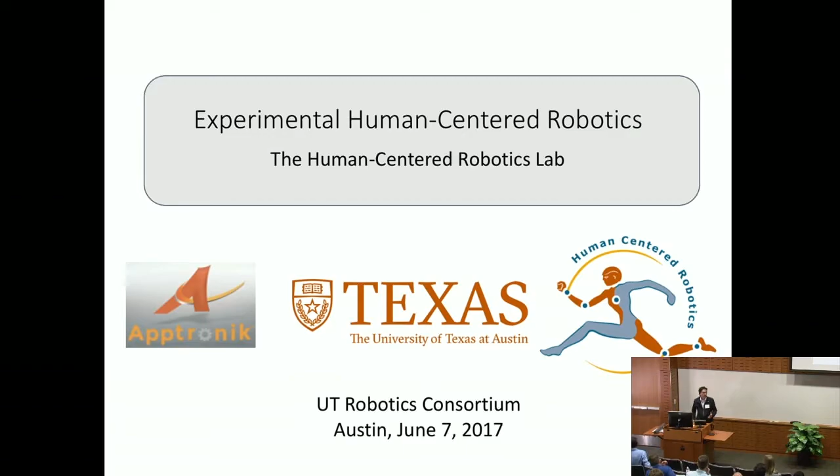I'm going to be much more concrete, talking a little bit and introducing the scientific aspect of what we do, and also the kind of spin-offs that come from Texas. I started myself as faculty here in aerospace about 7 years ago.

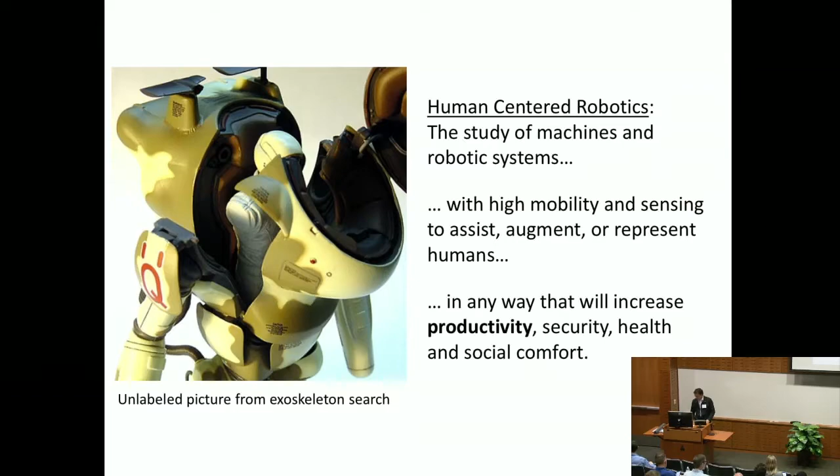What I call the field of human-centered robotics, these are systems that are mechatronically fairly complex, but at the end of the day, the equation we're trying to solve is productivity. Whatever that complex form takes, mobility, manipulation, and autonomy ultimately has to be productive, or has to allow us to be secure, healthy, and have social comfort.

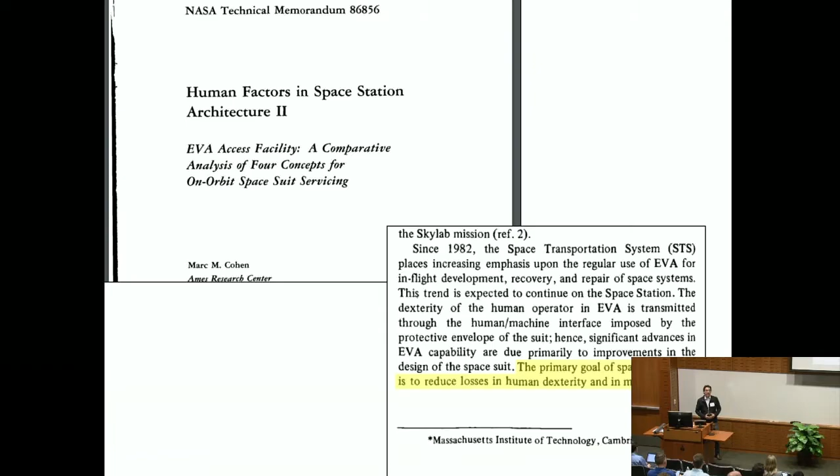Productivity is a big term for me, depending on the industry. For Disney, productivity in the world of robotics means entertaining. Industrial productivity means perhaps number of parts per hour, per investment, and so on. But for NASA, where I work a lot, productivity in an EVA exploration might mean the dexterity of wearing a suit. Robotics, exoskeletons, and so on have to fulfill these measures.

For that, I get inspiration from behavioral sciences, in efforts that those people are making into modeling cognitive behavior, doing inference over cognitive states like confidence and motivation, and in which ways we can use robotics and control theory to intervene in the way people end up doing things more effectively, more productively.

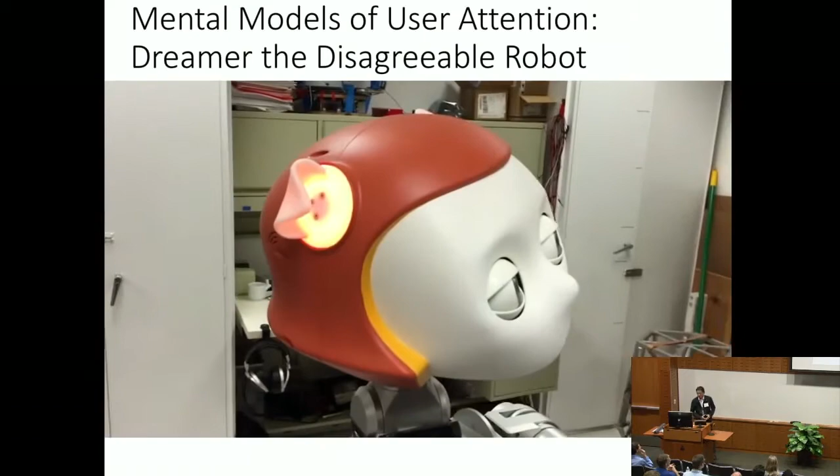These are some of my students playing with productivity models as dynamical systems influenced by a workload on a human, and by the own state of the system. We use this ultimately, as a proof of concept, to see how we can do this inference.

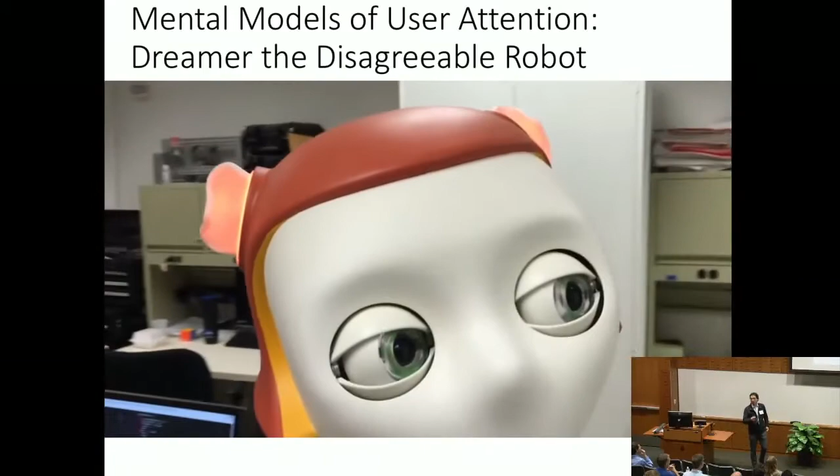In this case of being unproductive, the robot actually is looking away. When you look at the robot, we have a model of how upset the human is. It was not my choice, it was my student's choice—part of what the students do is play around. The robot turns its head based on these kinds of ideas.

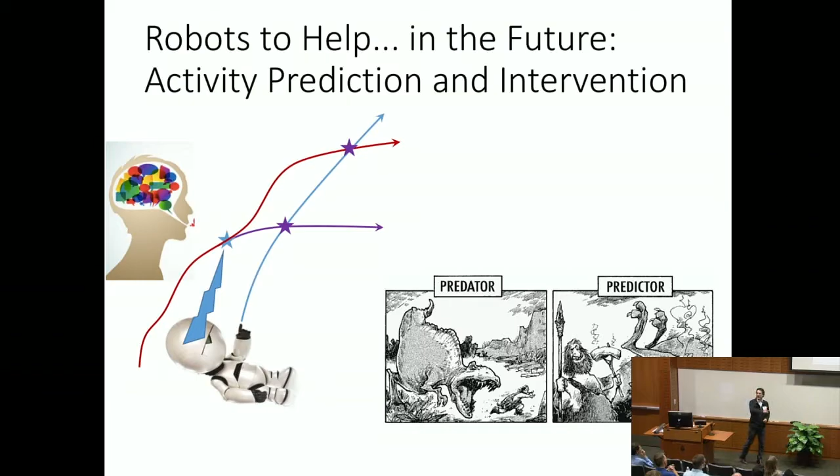Ultimately in robotics—and I come from Silicon Valley industry—productivity in the future might mean the robots have to predict more of what's going to happen in the future. They have to anticipate and then fulfill a task, a demand in the near future, as well as instantaneously.

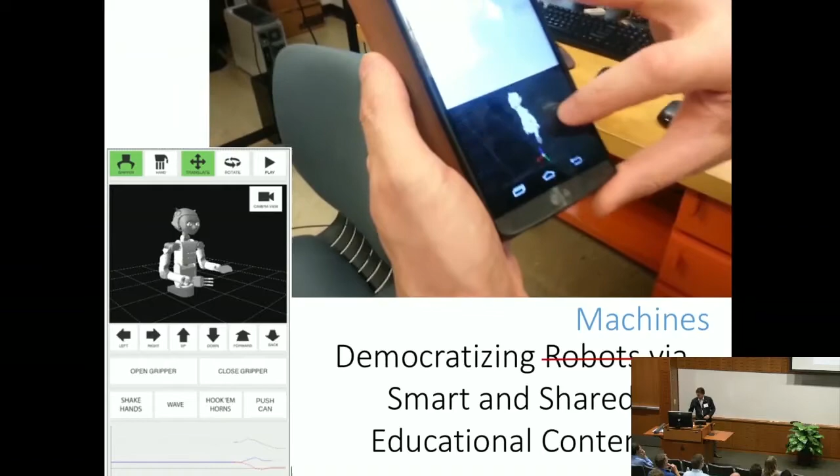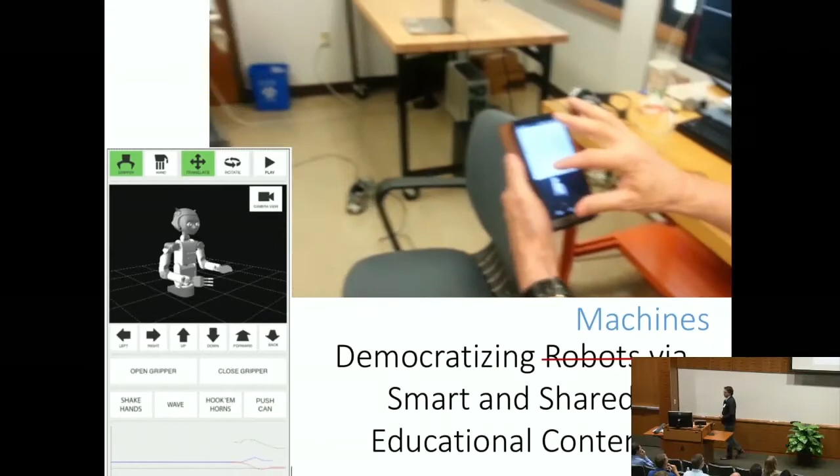So now Luis is going to go ahead and control the robot, Dreamer, for instance. First, let's go ahead and make it go into the ready position.

Okay, so he clicked a button on the screen.

From an academic standpoint, why would people connect to a robot? Well, content is very important—in this case, educational content, but also training content for companies. They want their people, technicians and engineers, more involved. So we focus on browser-based content for studying dynamical systems, control processes, vibration theory, and so forth.

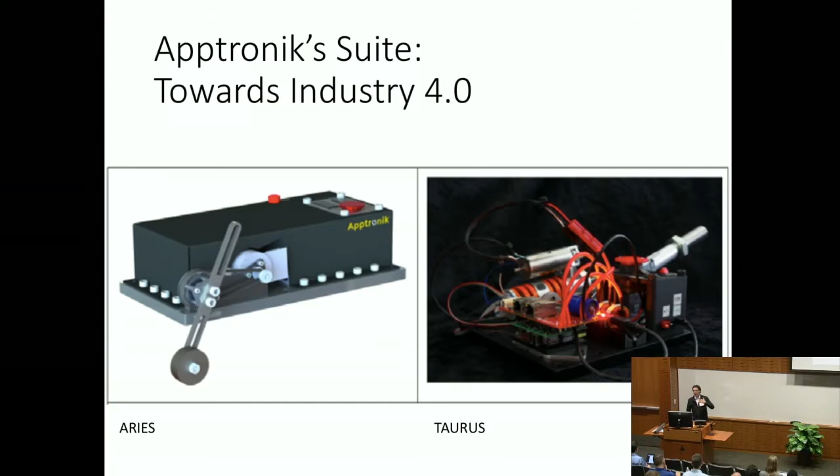One of the pushes we've had at UT is to create companies. In part, answering the question about devices, it's to some extent hard for us to maintain very complex devices, but we ambition to create them. One of the things a lot of the faculty here do is create companies. I am co-founder of a company called Apptronik. We develop these devices, and they are industrial grade—they can function for a long period of time and can be maintained.

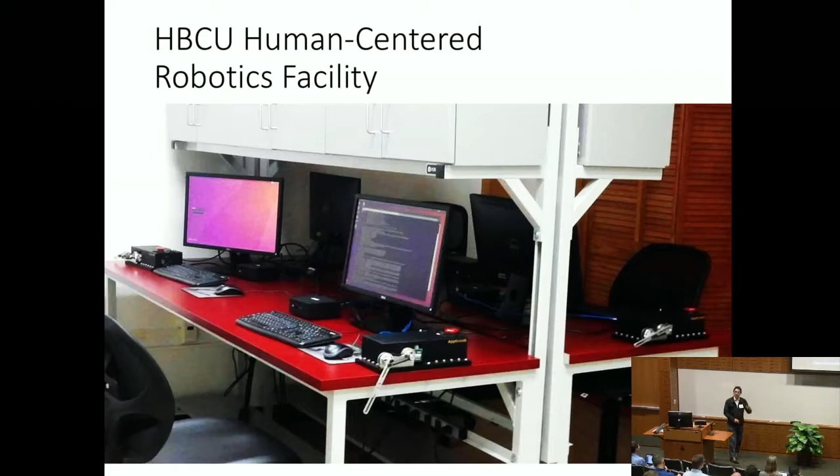These are devices we first developed for NASA. They are deployed. We build robotics facilities as a company and as a university. Huston-Tillotson, a historically black college, is part of this effort.

Another thing we do is create courses based on what we believe future industrial needs will be—in this case, prediction of some states of the human, and control processes for how robotics and human interaction can blend together. A lot of the focus in my lab, and I think I speak for many faculty here, is on collaboration with industry and with great laboratories like NASA.

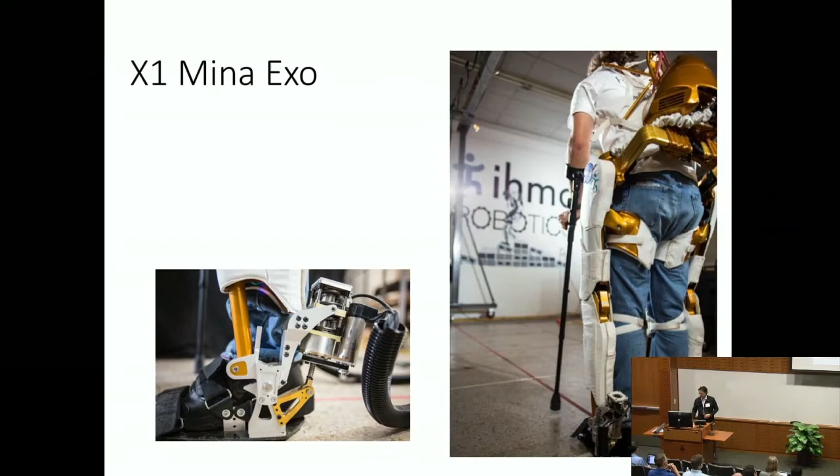These are some things my lab did—high power density actuators here in the ankle for the X1 MINA exoskeleton. We also built parts of this wonderful system used for Mars exploration. We have multiple actuators; this is one of them.

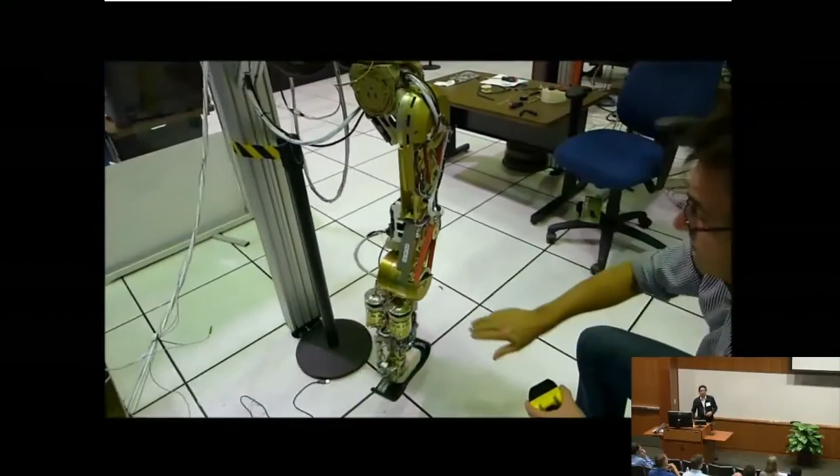We do a lot of compliant control, which is maybe some of what we'll see in the industry in the near future. We also do a little bit of field robotics. This system is commercialized nowadays, called Valkyrie.

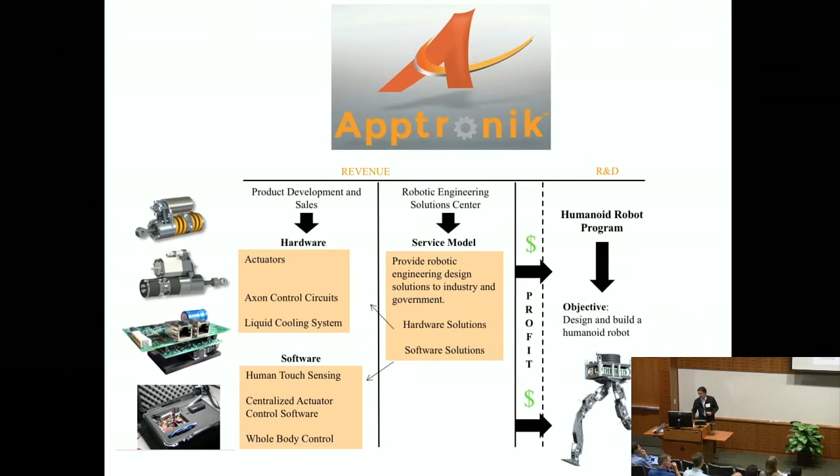Another thing this university has is the capability of creating companies, and we're supported by the Dean's Office. One of the things myself and others have done—here we actually have the CEO of my company, Bill Welch—is develop a company focused on the exoskeleton industry for aerospace and also for defense. This is one of our actuators, developed at UT, which recently became a patent and is now being sold to companies that build exoskeletons.

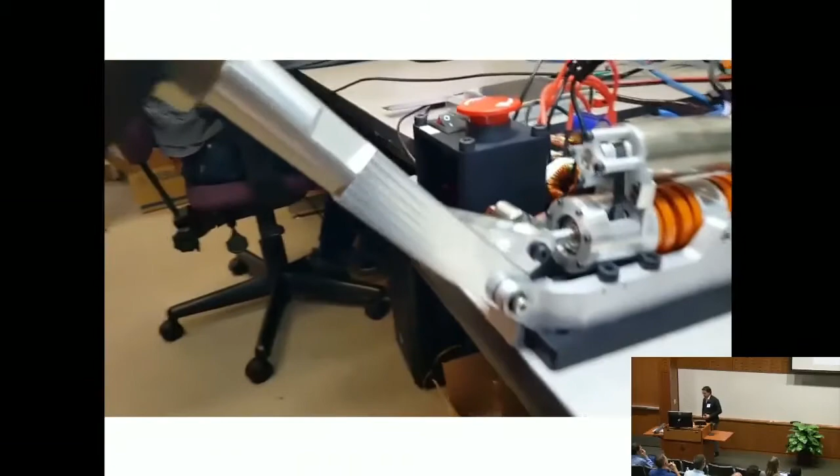These are force-controlled devices. This is a new series of it, partly developed at UT. It's liquid cooled, very high power density—so the goal here is something really small that can carry very heavy weights, enabling these dream devices.

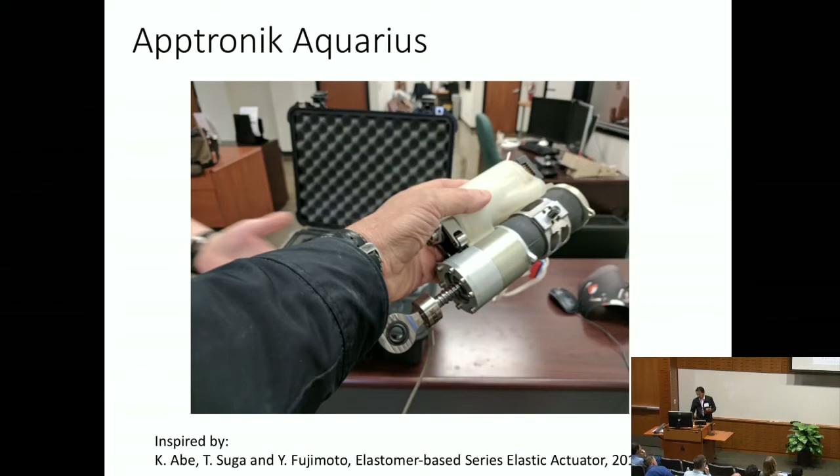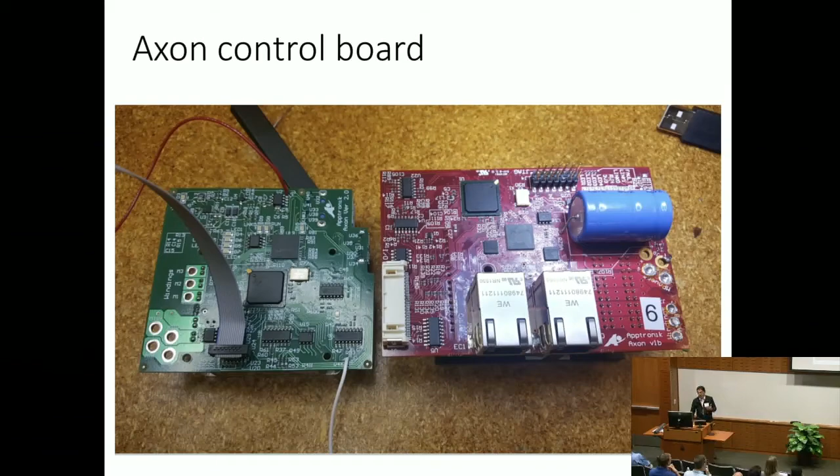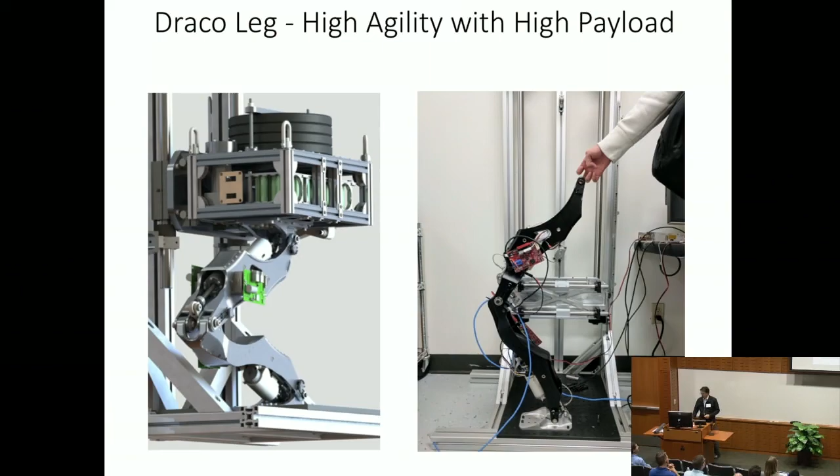We also do a lot of studies, both academic and industrial, on efficiency, communications, and so on. This is, I think, my last slide—we also work on system-level things, teaming with companies at UT to develop much more sophisticated devices. Again, this teaming with companies allows us to have much more of an impact on larger projects. And that's about all—thank you.